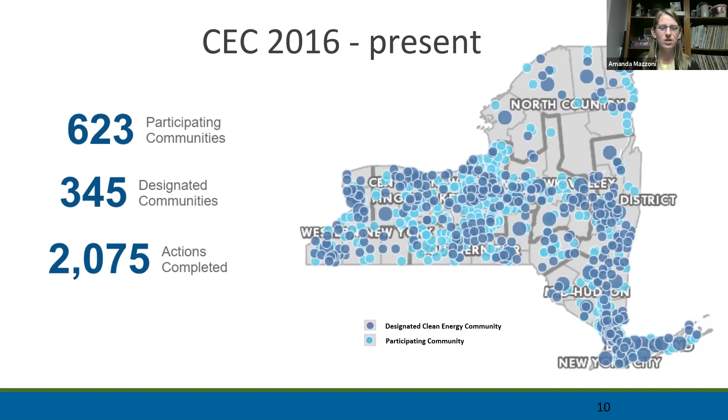also across the state. So once the original round of the Clean Energy Communities program ran out of funding, NYSERDA thought, well, we have all this great interest and communities are really interested in working through these types of energy efficiency, renewable energy projects. So let's keep it going. So they released the Clean Energy Community Leadership Round in January of this year. That includes some additional new high impact actions, as well as new opportunities for grant funding.

So the last round of the program, there was one method of receiving grants, that was through designation. So again, completing 4 high impact actions to become a designated clean energy community. Now those grants are still available. They're available at $5,000 per community. If you've already received a designation grant, you cannot receive another. But if you're a community that's only completed a couple of actions so far, this is still available to your community to pursue. There are 2 new types of grant funds available through this program as well.

Action grants. So some of the high impact actions have grants associated with just completing that one action. And then point-based grants: each of the high impact actions now has a certain amount of points associated with completing it. And there are grants available as you reach different points thresholds.

So what that looks like, if you are a small community, most of the municipalities in our region have a population of less than 40,000 people and are considered a small or medium-sized community. These grants are available per region. So they are first come, first serve. There's 40 grants available for our region at $10,000 for communities that earn at least 3,000 points. If a community earns 4,000 points and you're a small community, there are 10 grants available at $20,000 each. And then there are 4 grants available at $70,000 each if you earn 5,000 points.

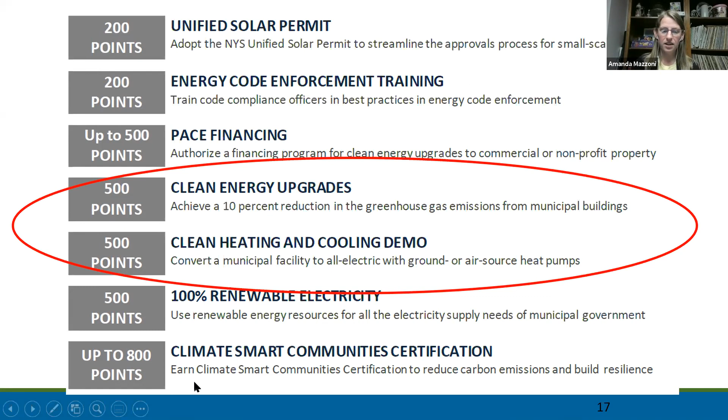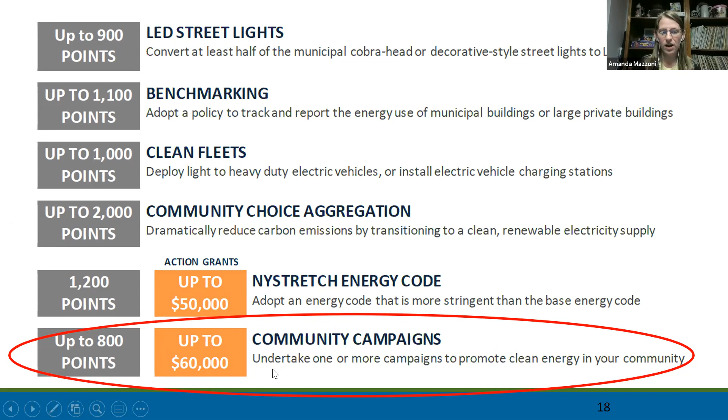And then the third action that I'll mention briefly is the community campaign, which is the more community-facing effort to getting constituents to implement energy efficiency and/or heat pump technologies in their homes. And I will just note here that the community campaigns is one of the two actions through the program that is also eligible for one of those action grants that I mentioned.

So first I'll mention the clean energy upgrades action. It is worth 500 points. The requirement is to reduce emissions in municipal buildings that are 1,000 square feet and larger by at least 10% through clean energy actions taken since January 1st of 2020.

So I've included some photos here of some communities that have received points already retroactively for completing these actions. In the past, it's been mostly for LED lighting and other types of upgrades at municipal buildings and facilities. But the opportunity now is that you can use energy efficiency upgrades like insulation and air sealing to count towards this reduction requirement and/or heat pump installations.

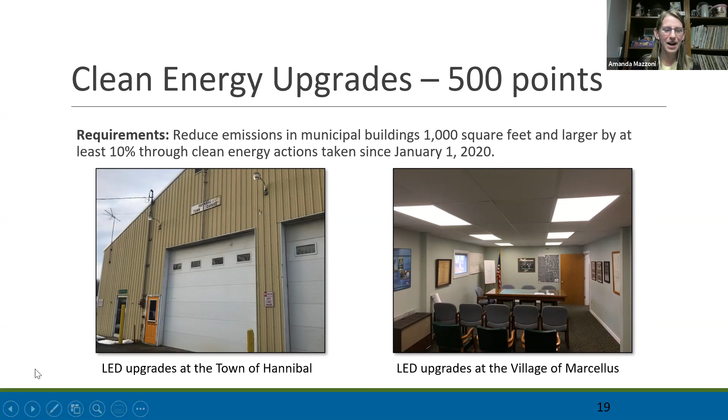So Lindsay will be discussing a little bit more later about heat pump technology and the assistance that HeatSmart CNY can provide in assessing these technologies in municipal buildings. But this is the first municipal building action that's related to energy efficiency and heat pumps.

And the second is the clean heating and cooling demo. This is also worth 500 points, and the requirement is to have at least one of your municipal buildings converted to heat pump technology for both heating and cooling and hot water heating since January 1st of 2020.

The building must be at least 1,000 square feet and has to be open to the public year long, as well as have an educational component like some materials or flyers that people can read or a kiosk that describes the benefits of electrification in buildings, to get the public more knowledgeable on the benefits and how they can help us reach those New York State goals that I mentioned at the beginning.

So I've included a couple of examples here from the village of Pulaski and the village of Cazenovia at municipal buildings where they have installed air source heat pumps already. And I know Lindsay has a couple of other examples that she'll be mentioning during her presentation as well. So they may be good communities to reach out to if you have questions about heat pumps in your municipal buildings and how to go through that process.

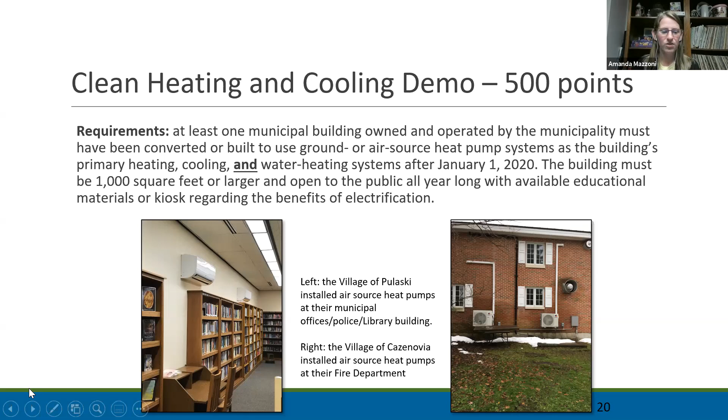And then finally, I apologize for the amount of text on this slide, but I really wanted to make sure you had all of the information in front of you and had these slides available to refer back to after the webinar. So for this final action, the community campaigns, the focus here is on clean heating and cooling and energy efficiency.

But I will also note that there are 3 other community campaign types that a municipality can pursue. They all work very similarly in that there is an education and outreach component with direct municipal participation. And they all also have a minimum number of signups in order to qualify for the 200 points and the action grant. So I'll just today explain specific requirements for the clean heating and cooling and energy efficiency campaign.

So this would require partnering with the local regional HeatSmart campaigns, including HeatSmart CNY, but having that direct municipal participation. And so if a community is interested in pursuing this action, the first step is to connect with me and Lindsay to fill out NYSERDA's required scoping document. So this is a document to help you organize your campaign. It'll explain who's going to be participating, what type of events you will be hosting, what partnerships you'll be having.

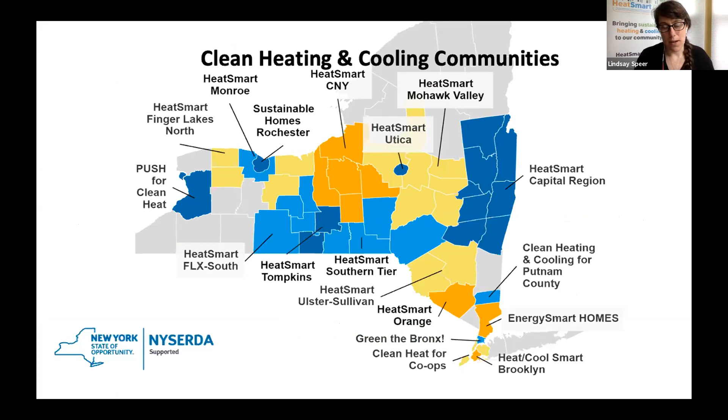The conventional wisdom has been that they don't work in Central New York, because air source heat pumps are used very commonly throughout much of the United States, and they do lose efficiency when it gets colder. Now, that said, there's been real improvements in air source heat pumps in the last 15 years. So now they have cold climate air source heat pumps that are designed to work at temperatures down to 15 degrees below 0 Fahrenheit, and sometimes even lower. So it's a really excellent opportunity to get ourselves off of expensive heating fuels like oil and propane.

And so basically it's capturing the energy that's outside. It takes the temperature that's outside, goes through a heat exchanger, brings it inside into a heat exchanger with some refrigerant. It compresses that gas. When you compress a gas, it makes it warmer. It makes the temperature you want inside your house. It goes through the distribution system, and then the refrigerant goes back outside, picks up more heat, brings it back in. In the summertime, it reverses. So a heat pump is not only just heating for your house, it's cooling.

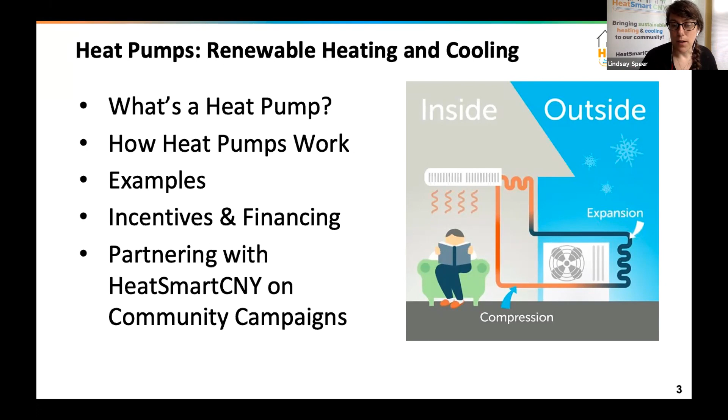And so we're going to go through some details here. I'm going to talk about examples and some incentives for financing that are available. And we're going to talk about what it looks like to partner with HeatSmart CNY on these community campaigns. So, sorry, into this already.

So you can see, we've had a lot of people in our program who have come through who have really old oil boilers, oil furnaces in their basements. They're tired of the leaks, they're tired of the smell, they're tired of the expense of it, and really want to make a change. A lot of households in upstate New York still have these systems. A lot of them are supplementing with wood, for example, to keep their costs down.

We have a lot of people who are growing older in their homes that are finding it more difficult to keep up with the wood. And many of them have turned to heat pumps as an alternative to that wood oil combination. So now they just have the wood in case it gets really super cold, and then they have the air source heat pumps to carry most of the load, or the geothermal heat pumps.

It's a way for us to heat our buildings without the pollution and fumes and expensive fossil fuels. And again, it adds cooling to a lot of homes that don't have it, which is a good climate adaptation strategy. Our summers are getting hotter, and people have a harder time dealing with that. It allows us to power it all with renewable energy and dramatically reduce our carbon emissions.

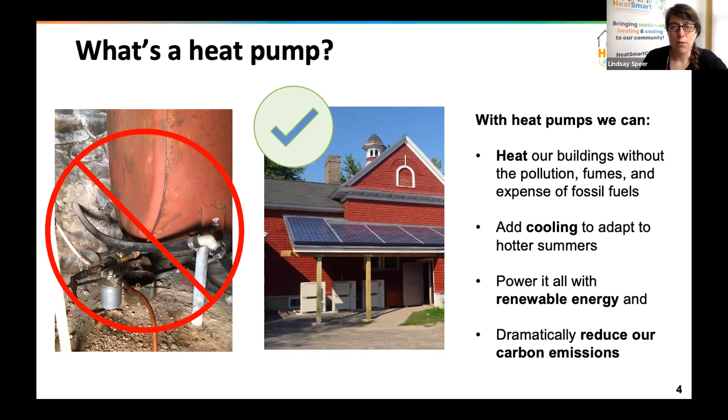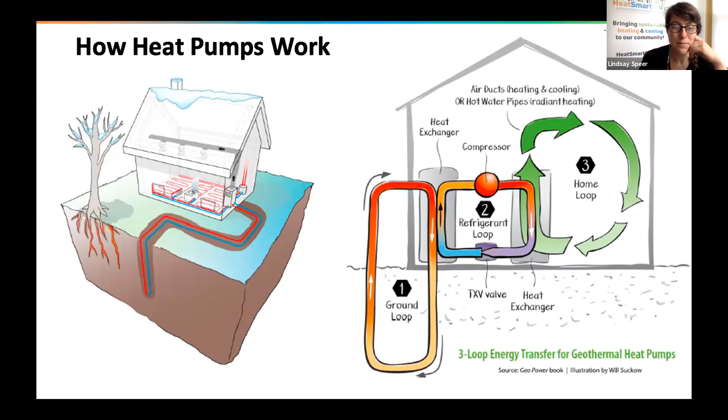We're seeing dramatic decreases in energy costs. I'll show a chart later. For people who are particularly on oil, propane, and resistance electric, three of the most expensive fuels to heat with. It also provides an opportunity to really upgrade the heating system for homes, because it provides more even temperatures, different zones, and again, cooling where it often didn't exist before, or very efficient cooling, much more efficient than the old window shakers.

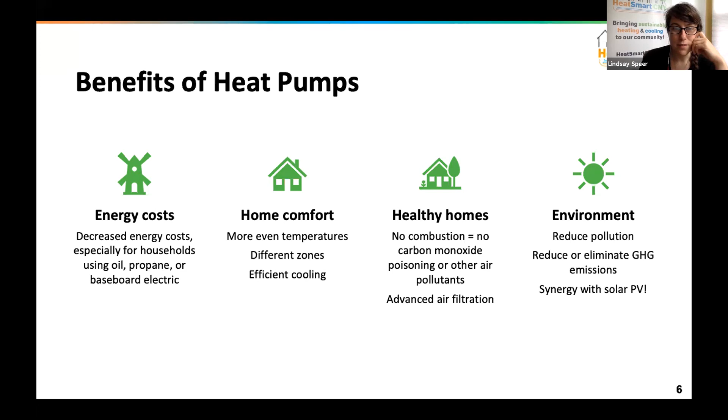And it's healthier homes. This year, we've all been thinking a lot more about respiratory impacts of our homes and the buildings and the places around us. And so, not having any combustion in the home means that there's no opportunity for carbon monoxide emissions in the house or other pollutants from combustion. And there is air filtration available with these. And again, it's good for the environment. And you can power them with solar panels.

If they pair it with solar, there's households that are only paying their electrical costs for the connection to the grid. And so they're basically paying $20 a month, and then all their heating and electricity is covered. You do have to have a relatively substantial solar panel system for that, but it is possible. You'll note that gas, and I haven't changed these numbers recently, but this was the way it was a couple of years ago.

Gas is currently an inexpensive fuel because we do not account for the societal costs of fracking in the costs of gas coming to our homes. And so for households making the switch from gas, usually it's a very similar cost of operation, but it doesn't have a payback period like the other fuels. That said, we've had a lot of people who just want to get off of gas. They want to get off of the explosion risk in their home, and they want to make that change.

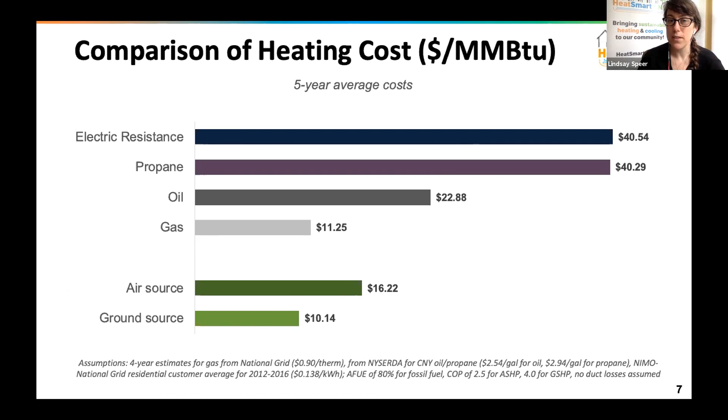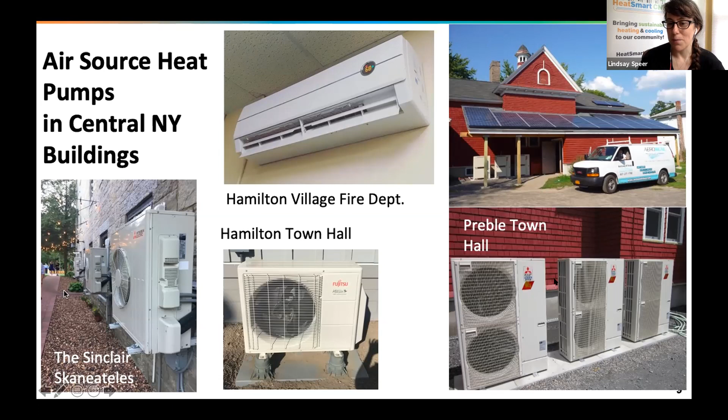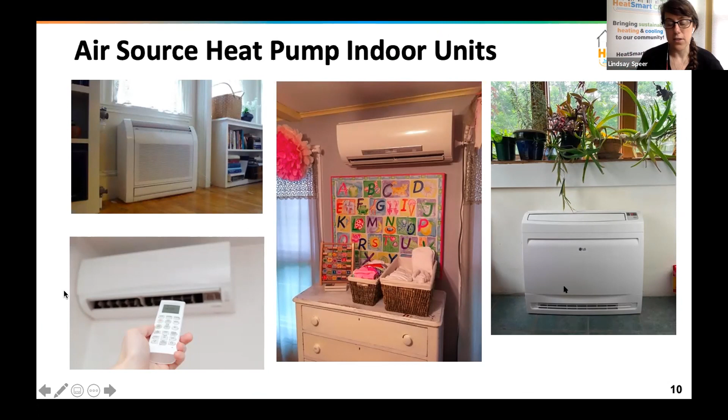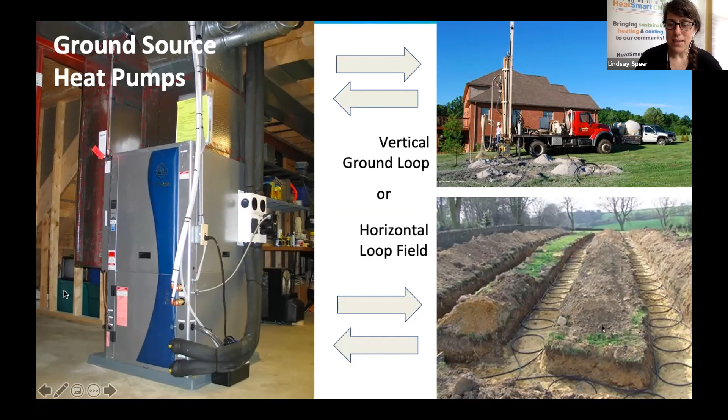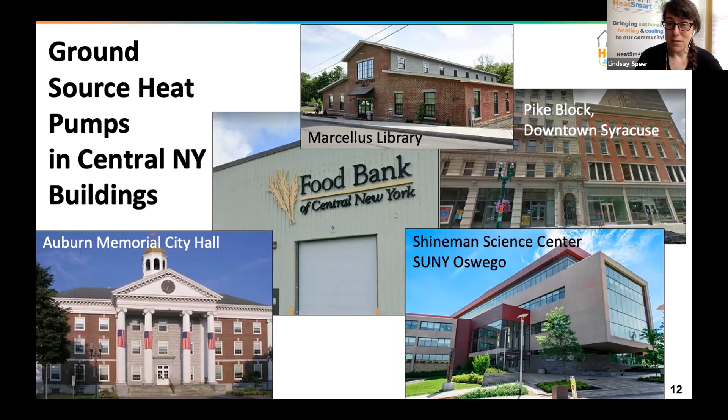Some examples of buildings with ground source heat pumps: the Marcellus Library, the Food Bank of Central New York's warehouse. Auburn Memorial City Hall has been geothermal for about 10 or 15 years now. The Shineman Science Center at SUNY Oswego, and the Pike Block in downtown Syracuse, which just goes to show how little space you need to do it. They drilled right through the sidewalk in downtown Syracuse. And I also want to highlight the Onondaga Nation Fire Department. They are solar and geothermal for their new community building in their fire department.

Heat pump water heaters are also one of the technologies that we're promoting. Basically this is a standalone unit, just like a conventional water heater. It's a little bit taller. It has this unit on top that's basically pulling from the air in the basement around it to bleed off some of that heat, pump up the temperature and put it into the water.

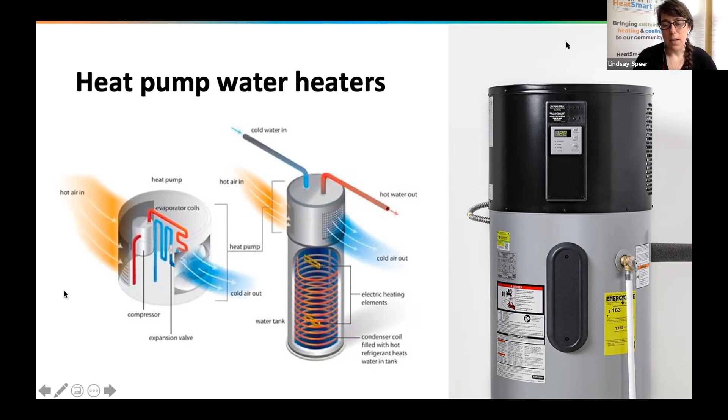And it has the benefits of being 2 to 3 times more efficient than a resistance electric water heater. And it also has a little bit of dehumidifying ability because of the way it's pulling the air. This is a comparatively really inexpensive way of getting into heat pumps. And so we're seeing a number of households do that. We're working with now 5 installers on this process.

We wanted to basically build off of the Solarize campaigns, do some pre-vetting of installers, give people recommendations of who they can go to. Sometimes it's just decision paralysis, not knowing who is reputable. We wanted to at least give people a choice of a number of them we can recommend. So you can see that they have a number of different specialties. Some do geothermal, some do air source, some focus more on the home performance. And we also are now adding in Breathe Easy combined with Zero Draft to our program.

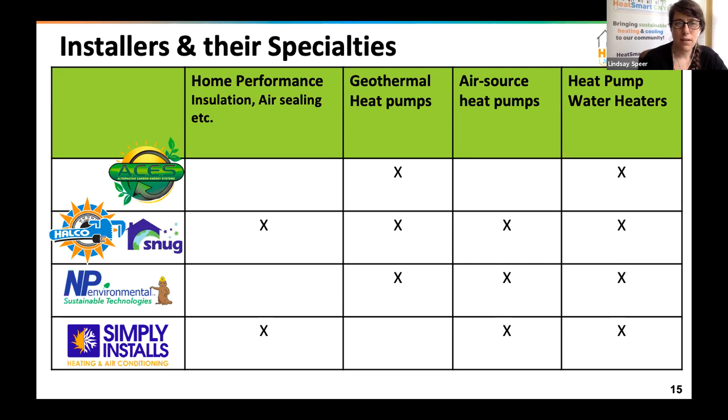So what do people install? Currently through the program, we've had 45 cold climate air source heat pumps installed, 30 ground source heat pumps. A lot of houses have done more insulation and air sealing, and no matter what fuel you're using, no matter what your heating system is, tightening up the home, making it more energy efficient is a great way of improving comfort and reducing energy bills in general.

We've done some dual fuel systems, which is a combination of gas and air source heat pumps. So it allows households on gas to get the benefits of air source heat pumps, and then when the cost difference makes more sense for them to use gas, they can switch over. There's not as much climate savings from that, but it's still a benefit, and it's sort of a baby step towards heat pumps for a number of people. And of course, heat pump water heaters.

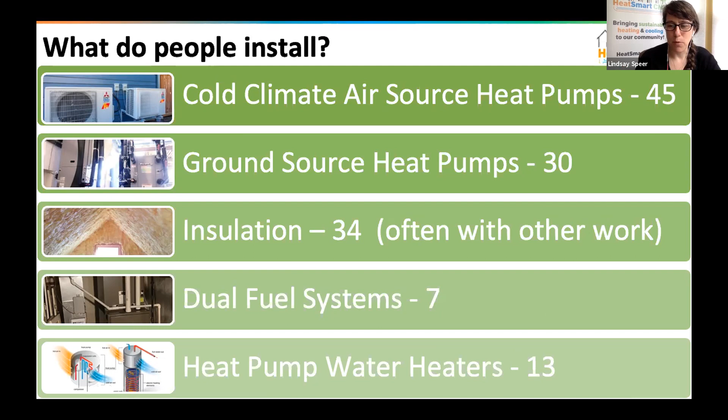There's a number of programs available currently to help people with the costs. Anytime you do home improvement projects, it's always expensive, and even more so this year, unfortunately, because of some of the supply chain issues. NYSERDA has a number of programs for people of all income levels to help with the energy efficiency work. So insulation, air sealing, this can also include things like LED light bulbs. And this is an opportunity to let the residents of your town know about these opportunities.

For low-income households, there's the Empower program. This is for people at 60% of area median income and lower. So if they qualify for SNAP or HEAP or other programs like that, they would qualify for Empower. That's up to $10,000 of energy efficiency work, insulation, for no cost to them.

It's a huge benefit for people who are in between 60 to 120% of area median income, and that's going to be good through the fall. It's going to decrease to about 100% of area median income in the fall. There's the Assisted Home Performance Program. It's a 50% cost share, for up to $10,000. So the household would put up to $5,000 into the project, and NYSERDA would match the other $5,000.

And then for market rate households, there's a program called Comfort Home. It's up to $4,000 for insulation, air sealing, and doing your windows. It's a tiered level system. If you're just doing insulation and air sealing, it's about $2,000 of a benefit.

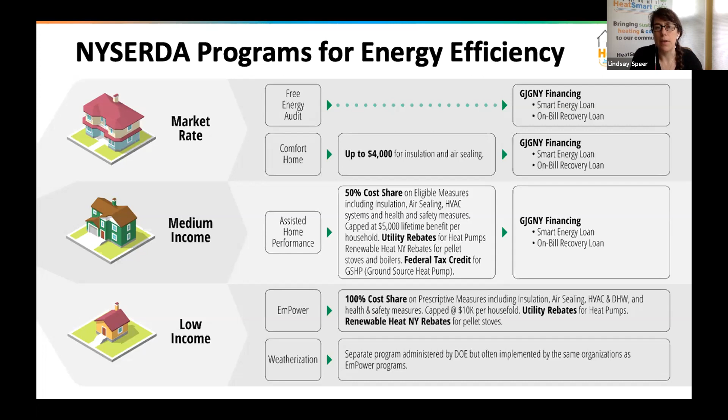And then for heat pumps, there are currently major incentives through the utilities and NYSERDA through the New York State Clean Heat Incentive Program. And that's going to be running for about 5 years, and who knows what it's going to do after that. So that's ongoing. It's totally available.

For cold climate air source heat pumps, you're looking at about $1,000 per 10,000 BTU hours. We're seeing for most houses that's $2,000 to $5,000 or so. Ground source heat pumps, it's a $1,500 incentive per 10,000 BTU hours. And there's a $700 heat pump water heater incentive.

I will note that I've been talking about residential for the most part. The New York State Clean Heat incentives also apply to all buildings up to 300,000 BTU hours of heating load. So small businesses, nonprofits, faith communities, they all would for the most part fall into this incentive program.

There are incentives for buildings that are greater than 300,000 BTU hours. It's a per MMBTU savings. So it's basically calculated on the amount of energy savings of a project. So that gets a little bit more complicated to explain.

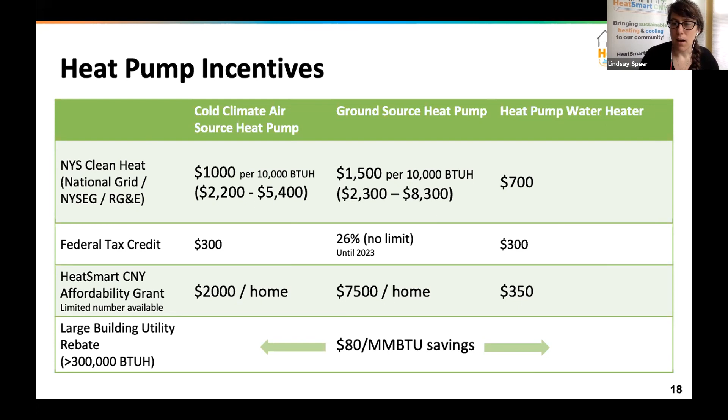We also have an affordability grant through HeatSmart CNY. It's currently at $2,000 a home for air source heat pumps, $7,500 a home for ground source heat pumps, and $350 for heat pump water heaters. The goal is to try to drive down the upfront costs. What are those upfront costs?

Well, here's some examples. So here's a house in Cayuga County that was a HeatSmart program house. This was a market rate house. They did basically 2 outdoor units, 4 indoor units, converting off of oil. When the homeowners were living in it, they used wood to keep the costs down. They ended up buying another house and started renting this one out.

They didn't trust the tenants to use the stove safely. And so they were all oil, and they were paying for the heat, and the rent from the tenants didn't even cover the heat. So they've installed a cold climate air source heat pump system. It's kept the costs much, much lower for them.

They got a $4,000 NYSERDA rebate at the time. Again, that now would be a more significant rebate through the utility New York State Clean Heat Program. And they also did insulation and air sealing work.

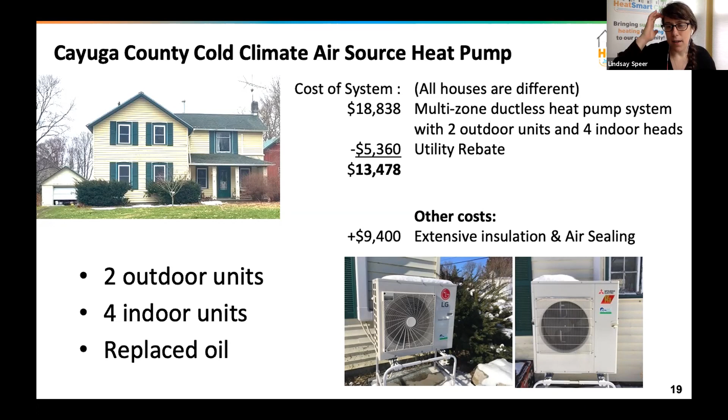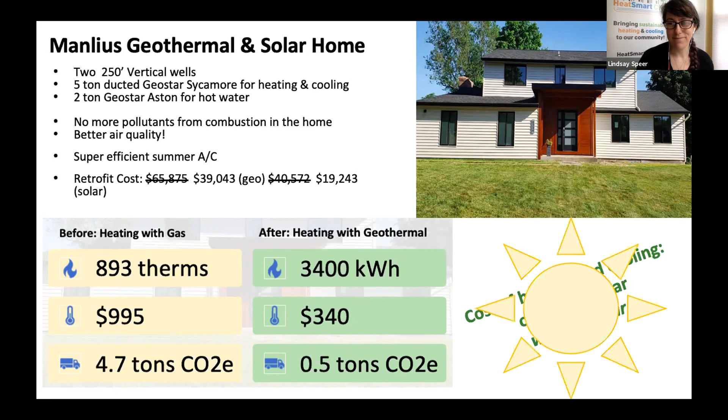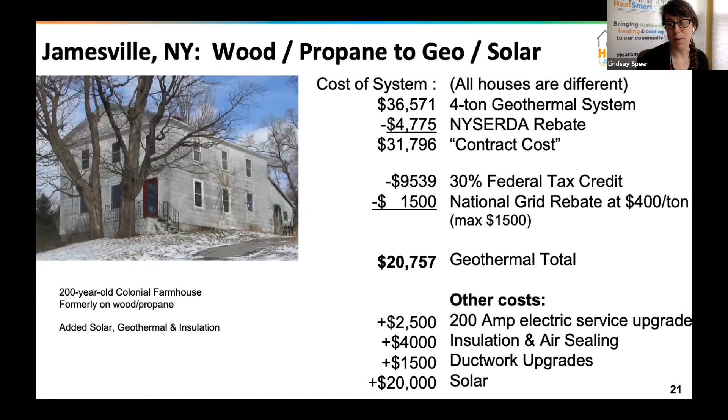Again, it was a substantial investment, but this basically brought a 200-year-old house into this century. She's only paying $20 a month for her utility bill at this point. All heating, all electric is covered because she put in a substantial solar panel system.

All right, here's some examples. We've seen a lot of homes do that solar geo combination. It makes them net zero or nearly net zero, depending on what other electric uses they have in the house. If people have electric vehicles, they maybe haven't quite covered the whole load with their solar panels.

So, community campaigns. Over the past three years, we've worked with a number of municipalities already in a sort of light touch kind of way. We worked with the town of Lafayette, we worked with the village of Homer, and we would collaborate on an event together and put some information out in their newsletter. The community campaigns through the Clean Energy Communities Program are a little bit more substantial, but we have this campaign running for HeatSmart CNY.

We're running for another year throughout all five counties of Central New York: Onondaga, Oswego, Cayuga, Cortland, and Madison. One of the things that you can benefit from by signing up to do your community campaign sooner rather than later is that any enrollments that come in from your municipality after you've signed up, you can count towards your credit.

That said, we do need partners on the ground to help create events and to utilize your local organizing and local communications pathways to help get the word out. Draw on your partnerships with local organizations. We have templates for media advisories, press releases, newsletter articles, social media. We've got lawn signs and flyers we can share. We're happy to do training on outreach around heat pumps, and we can handle all the tracking of the enrollees.